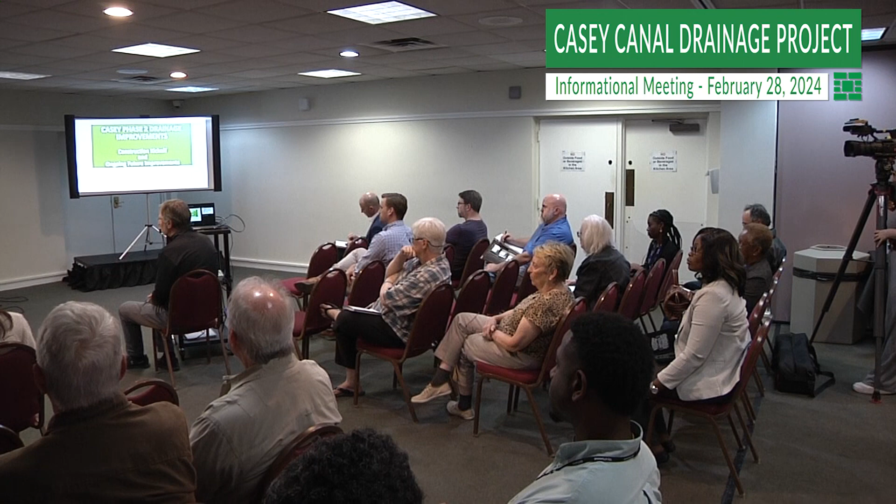Community resilience is an important thing and something we have to continually strive for. Many of the pipes you'll see in the street below you are as little as 11 inches in diameter. They're made of terracotta, made of clay, and what you're going to be seeing for the most part are two double 72-inch pipes, double barrel shotgun pipes coming down to upgrade that infrastructure.

On the maps around the wall, anything in purple is in the 100-year floodplain. That means if you experience a direct hit from a tropical system, your home is expected to flood. We've been very, very lucky not to experience that direct hit, and now we don't have to hope on a wing and a prayer any longer, because this infrastructure is on the way.

So, without further ado, I'd like to introduce you to some members of our team. We have joining with us Ron Feldner, give him a wave, Ron. That's our Senior Water Services Director. And I'll be passing the baton to Mr. Zach Hoffman coming up in a second.

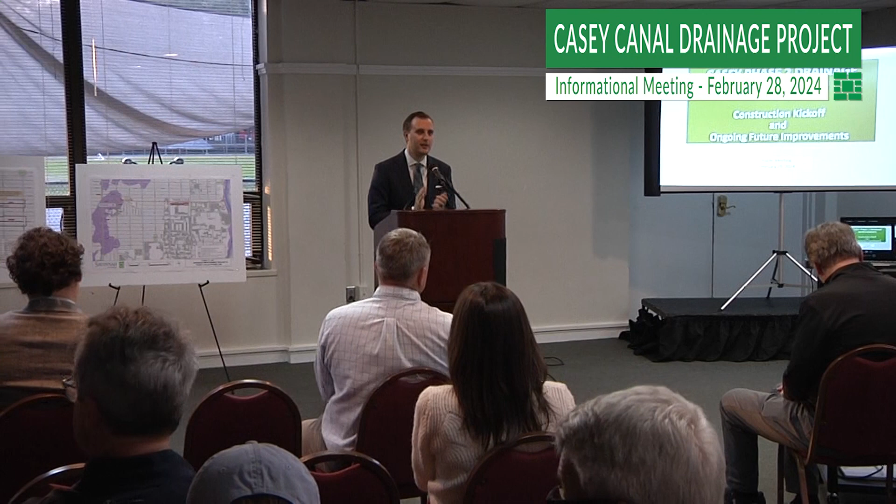These are the folks that are going to be doing the outreach, digging in the dirt, turning over some things, and we will be experiencing inconveniences in the neighborhood. That is the trade-off. But we can't hope and pray that a tropical system is not going to hit us in the future. We need to be prepared for tomorrow.

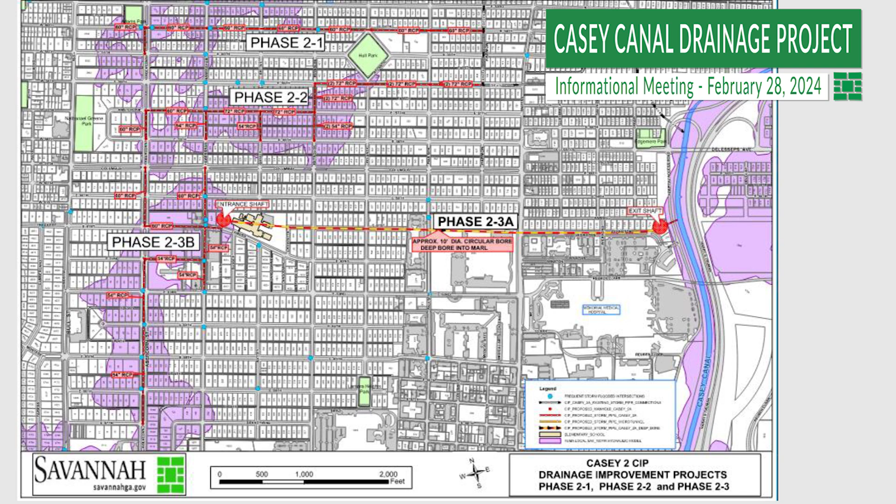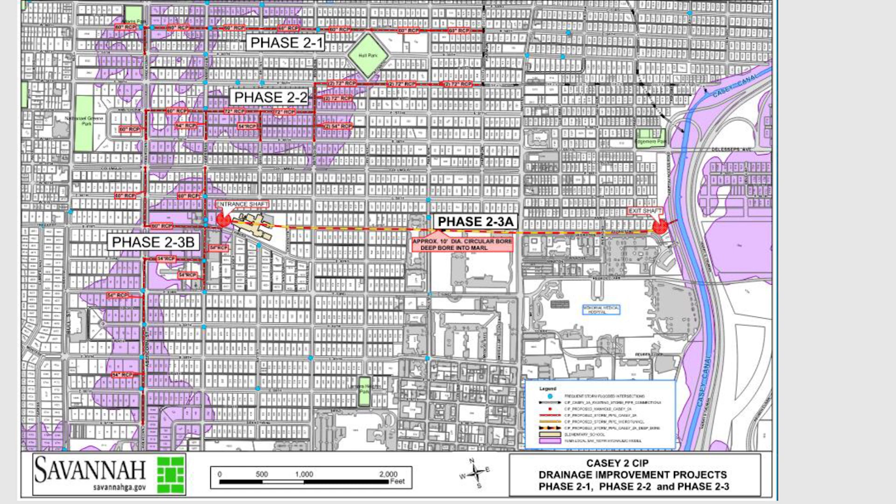You also see on this slide the phase 2-3B and 2-3A. Keep that in mind and keep this general area in mind for the next slide, where you're seeing this flooding today—that's based on our own modeling efforts with today's storm drainage infrastructure in place.

So with the next slide—Nick provided me this, I don't know where he found it, pieces taped together or whatever, some historic map. But what you can see here is basically what he was referring to as Durin Swamp. So essentially this is kind of your...

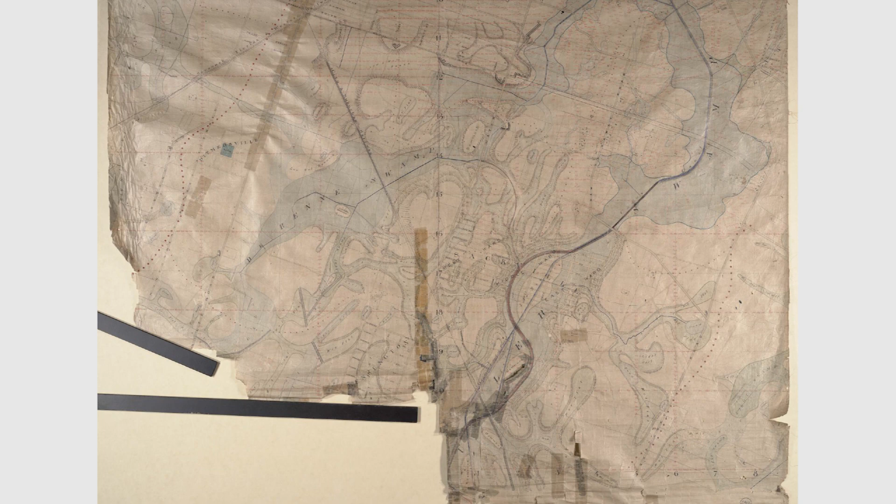Truman Parkway and the Casey Canal, which runs through this area, which was a low-lying swamp area. This is Chatham Crescent right up in here. And then this is what we're talking about right now, Hull Park, somewhere right in here, right in the middle of this Durin Swamp. And right about here, for your bearings, is Habersham Village. So all of that falls within what was historically referred to as Durin Swamp, with ditches that drained it out and everything. If you move to the next slide, this then kind of overlays.

And sure enough, we today have major drainage infrastructure, double 6-foot by 6-foot box culverts that run that same alignment. So we've maintained that same drainage. But as the neighborhoods got built out, wetlands got filled, swamp got filled, and now these areas are the low-lying areas, just like they were historically. And so we have to get that water from that Durin swamp over to the Casey Canal to then drain out, make its way down towards the Vernon River eventually.

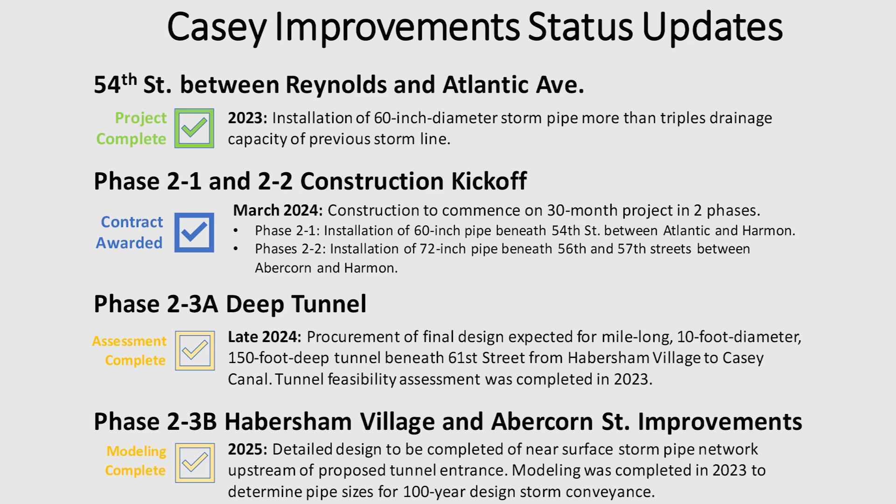So we're looking, moving forward with procurement of that final design. And hopefully if we get that, everything gets procured, we could have that done by, say, the end of next year. At that point in time, we will have good numbers on projected cost of that project, and we can then identify our funding source and everything to try to move that project to construction. With that tunnel will be the near surface drainage improvements, near surface underground pipes that will cover the area essentially of Habersham Village and Abercorn Street, which, as much as these are kind of neighborhood-based projects, we all use Abercorn. So it's a huge benefit to the neighborhood, but I think it's a benefit to the community as a whole because we're all traversing through these areas, possibly during a large event.

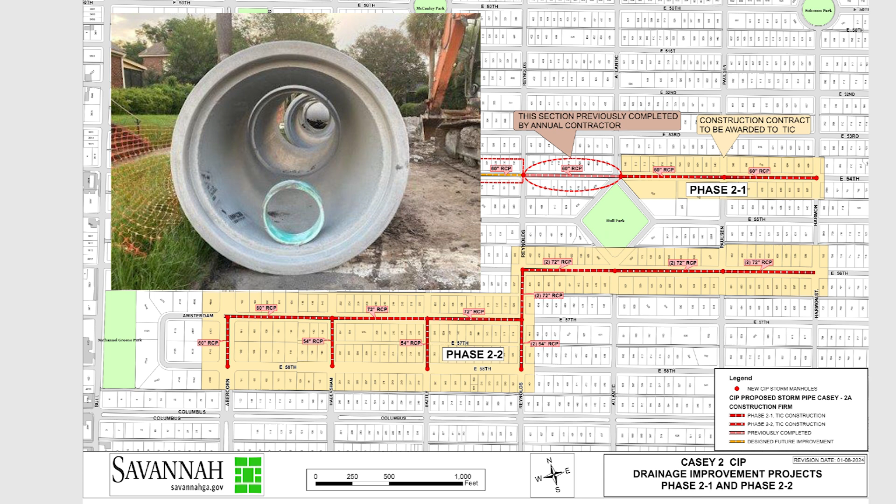That's a good point to make too. So we currently have on Harmon running north-south a twin 6-foot by 10-foot box culvert, very large infrastructure that was actually built in the Casey Phase 1 project, done in the early 2000s. If folks were present during that, I know there was some concern that was very deep construction, driving sheet pile. There were some issues with that project, and I'm very familiar with all those issues.

We wanted to make absolutely certain that this project was not that project, and it is not. I want to make sure everyone realizes that this project, we are not driving sheet pile. We're using standard open cut trench box excavation, and we have no plans whatsoever to drive sheet pile.

Our deepest excavations are at Harmon Street to tie into that infrastructure that was put in with Casey Phase 1. Luckily there was enough capacity on that system that we could tie these projects into it and provide 100-year storm conveyance. So starting at Harmon, working to Atlantic, then crews are planning to start back at Harmon and 56th Street, working up gradient as far as the fall of the pipe, drainage through the pipe, and then coming down 57th out to Abercorn.

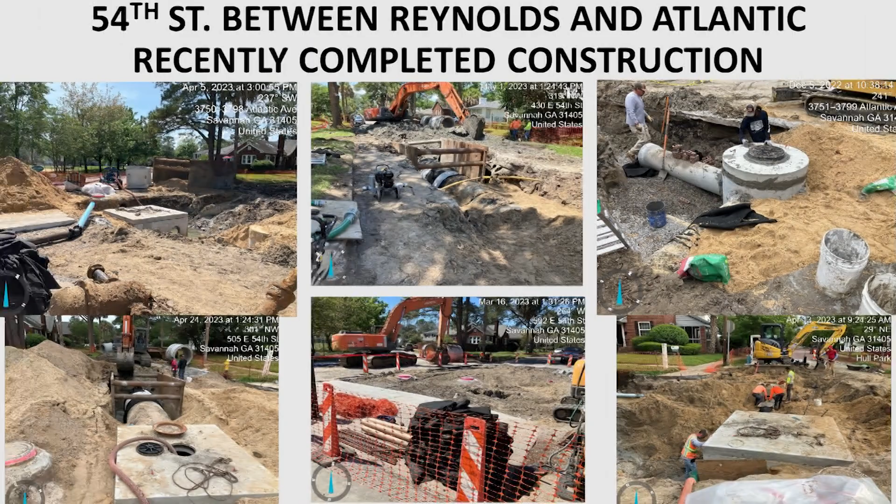So, next slide. Just to give an idea, this is 54th Street, some characteristic photographs of the size of equipment that would be present, type of excavation in the roadway, trench box type construction. Again, no sheet pile. A moving operation, installing hopefully a few sticks of pipe a day, and moving along. Yes, driveways will be impacted, in front of homes will be impacted. All the work should be occurring within the right of way, hopefully more so between curb line to curb line.

That might be a little more difficult when it comes to 56th Street, where we're putting in the twin 72-inch pipes. That's some big diameter infrastructure, so it really takes up a good bit of the roadway. With this work, we'll also be replacing—luckily our sewer, the resident sewer, runs in the lanes, so we're not affecting that. But what runs in the road along 56th, 54th, and 57th Street is storm and the water mains. So with this project, we'll actually be replacing the water mains and replacing those laterals out to the water meters. That'll be a benefit of the project as well, not only storm drainage.

So we can go to the next slide. Again, that was 54th, the one block. I wanted to point out with this slide, we did design this project, Phase 2-1—we did this last year, this block—but we did design this to actually come down 54th Street to Abercorn as well. When we put this out to bid, we have a budget like everyone else, and we did have to step back on the full scope of this work because of budget constraints. So that portion is designed. We still have plans to do that portion of the project, but funding will have to become available to progress forward with that section, and that would be a future phase then.

Backfilled, bladed off, compacted, and that disturbance that's in front of your house one day, possibly for a week, is hopefully moving on past your house. Right now, the contractor is telling us he expects to not impact any driveway more than 2 weeks. So it's a moving operation. Will you have asphalt out in front of your house? No, it may be dirt, gravel temporarily that can be driven and traversed over, until we come back, and then everyone gets a new street also, new asphalt curb to curb. So everywhere along this route will be new pavement when it's all said and done.

Okay, so this is where I wanted to focus on the construction and what's starting here late next month, but I'd be remiss if I didn't talk about the tunnel project that we're all very excited about. New technology—well, not new technology in general, but new technology for Savannah. We don't have any other deep tunnels that I'm aware of in Savannah.

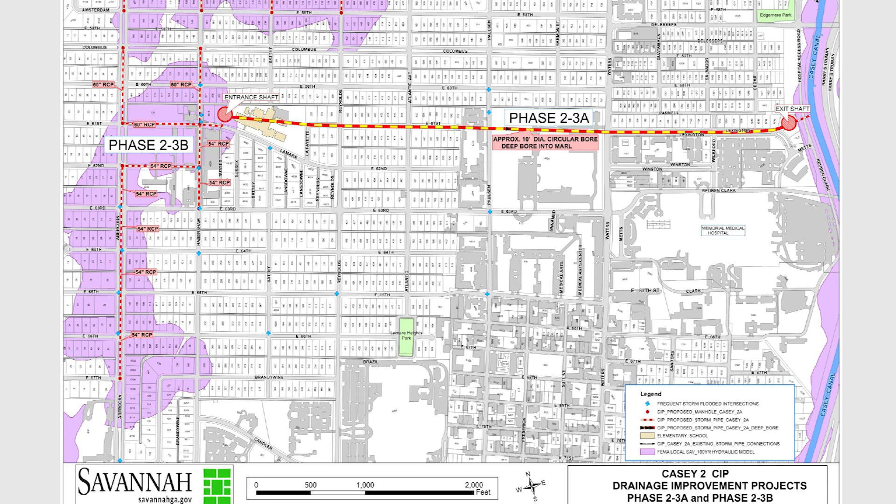That is critical, because when we were looking at draining this area of Habersham Village and designing it, that's what kept making us step back, is deep excavation, because we go through essentially this Durin swamp, which runs northeast-southwest, but then we're getting the water to the Casey Canal, and the problem is this area runs also northeast-southwest, it's kind of a ridge. So to get through that ridge, getting water to the Casey Canal, that's where we were having to look at deep excavation.

And sheet pile if we were installing that infrastructure from the surface. That's where you get into damaging houses and vibrations and all that kind of stuff, and we're out of that game. So we moved to this technology, and I'm very excited about it, excited about the opportunity to use this to take care of this area.

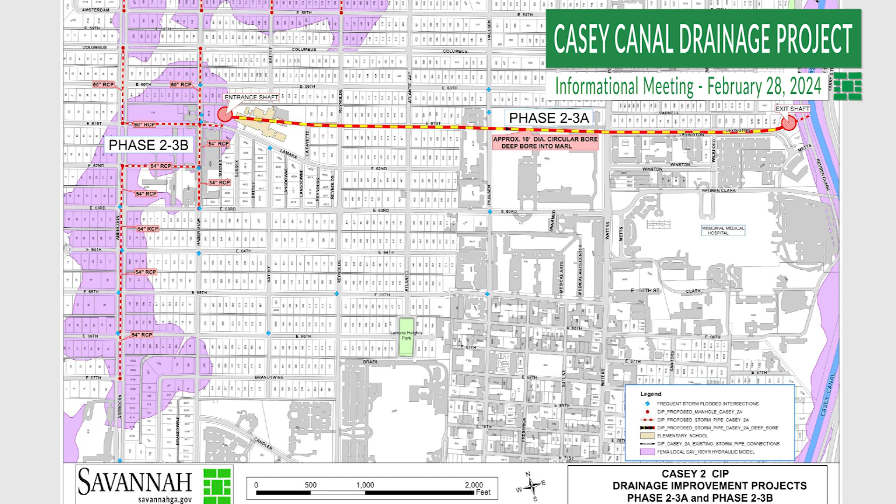So we are moving forward with, we have the funding to move forward with final design of the tunnel. And hopefully we can procure that to get started, and in about another year and a half, have that design done, and then be looking at our funding opportunities, grants, SPLOST, whatever opportunities we can to try to move forward with that project.

I'll let, I've got Stephen O'Connor and Jonathan Ladd with Black and Veatch, who did our feasibility study last year on the tunnel, talk about it. Some of these photos are examples of the tunnels they did in Charleston. I'll give him an opportunity to spotlight this on a few more slides, and then we'll be open for questions and we can break out.

Thanks, Zach. As Zach mentioned, this technology has been used in Charleston for over 25 years. The image on the screen here is the Spring Fishburne Tunnel. Very similar geology, so we did borings during the feasibility study here to confirm that the geology underneath Savannah would be acceptable for tunneling, and it is.

It's a Cooper marl material, a clay, very stiff clay that you can usually excavate sometimes by hand, via a simple tunnel boring machine, which is what we'd anticipate for this project. So the diameter of the tunnel would be about 10 to 11 foot excavated, and that's what you're seeing here.

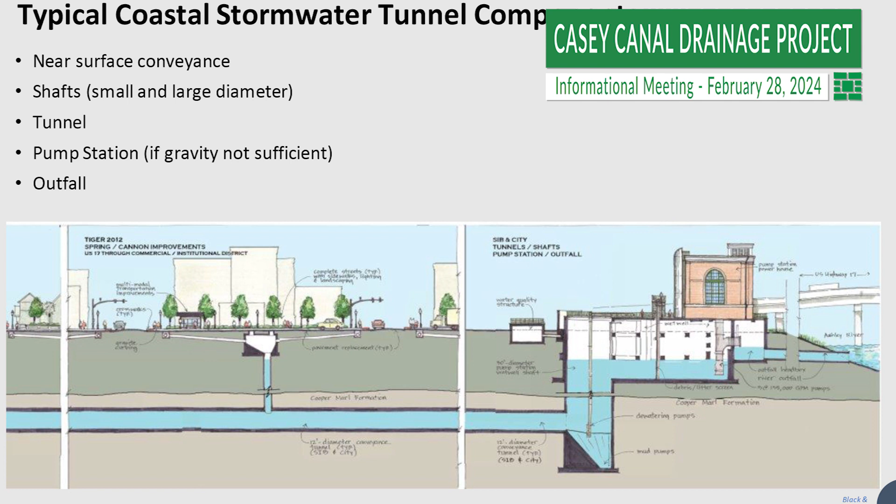So in Charleston, very similar idea. You have the near surface connections, similar to what Zach was showing in the other photos, the box structures, the traditional reinforced concrete pipe, collects the water at the surface, puts it down a deep vertical shaft, and then into your deep tunnel. We'll be about 100 feet below Savannah here, and then via gravity, it will flow to the Casey Canal. Same here, there'll be a deep shaft, so the tunnel will come in, water comes from the surface into the tunnel, and ultimately out through an outfall into the canal. A pump station can be added later for additional volume, but the idea is that you have gravity flow.

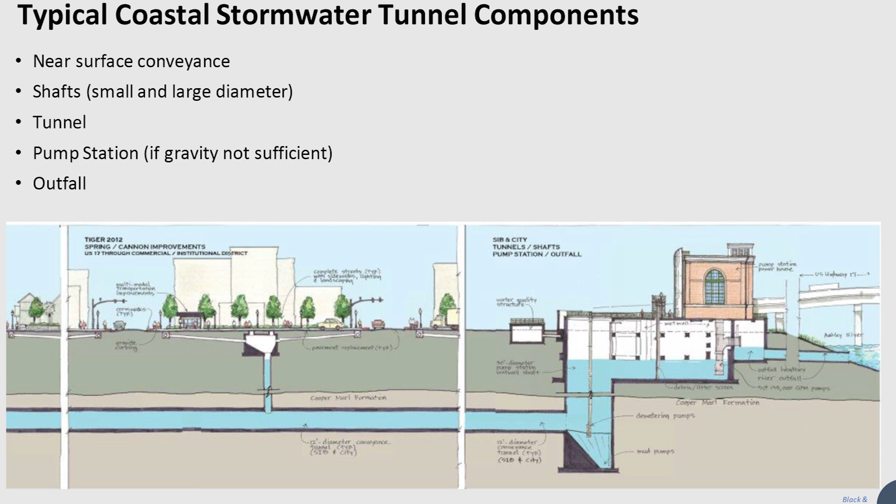Zach showed the photo, and a really good example is you're not disrupting but two areas for the entire project. That's the uniqueness. You have a shaft site at one end and one shaft site at the other, and everything in between is deep below the infrastructure and is not causing any disruption.

This is intended to show that everything still remains on the surface. You can still build infrastructure on top of the tunnel, so that's part of the consideration. There's an easement, deep easement below, and then everything above can still remain. This is showing that piles can still be driven. Infrastructure above is not impacted by the tunnel construction.

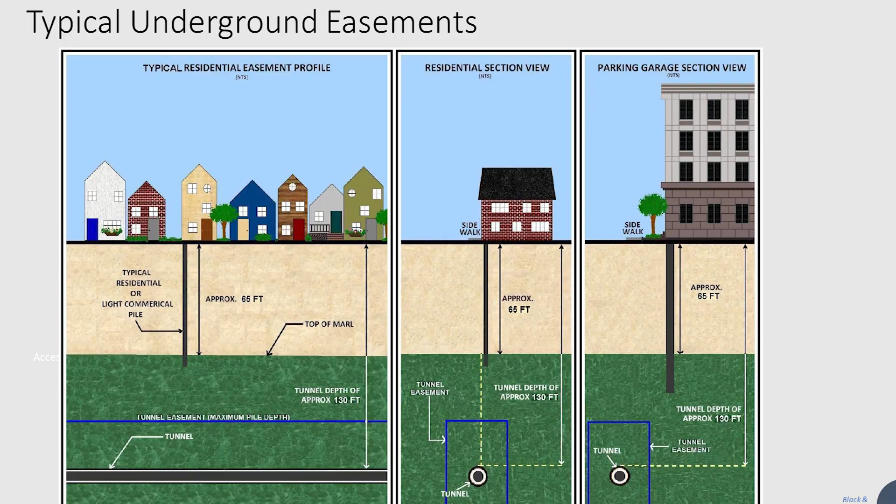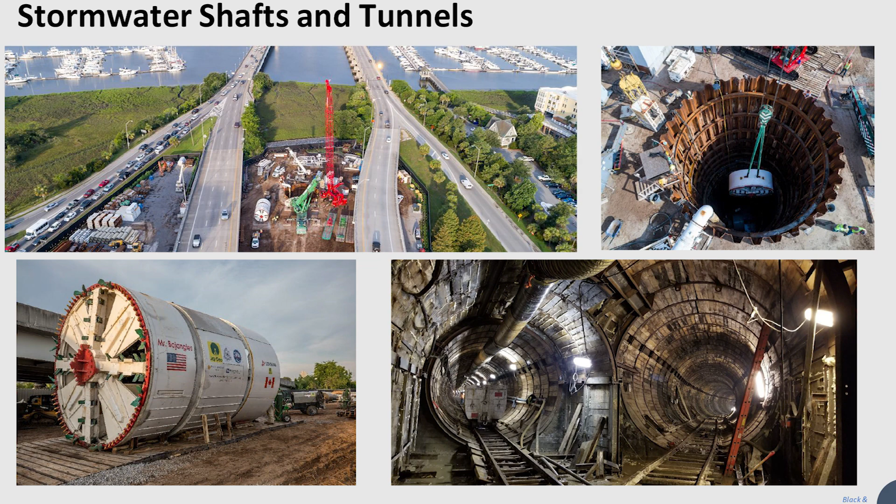So that's kind of the similar technology we'd anticipate - a machine that's proven and has been used in other similar ground. This is between infrastructure, the US 17 bridges over the Ashley River, showing how close you can get to some critical infrastructure with these deep shaft locations.

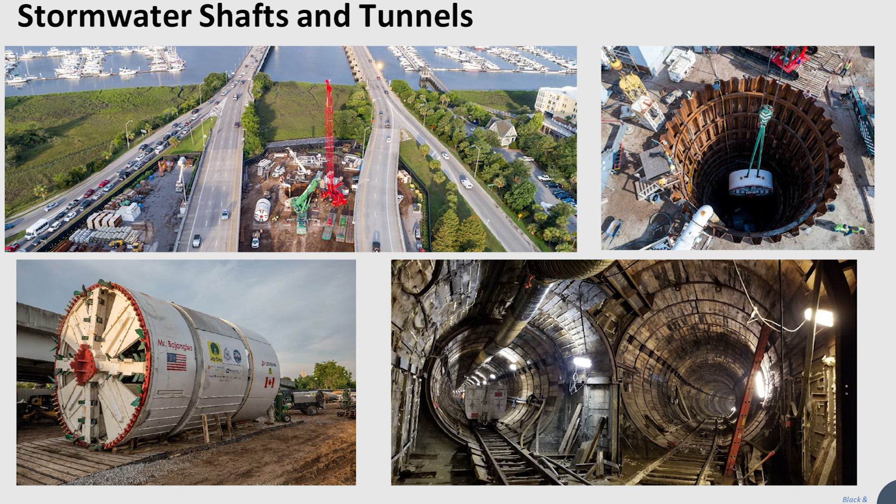Here's an image of the tunnel boring machine being lowered into the shaft. This looks like a mirror image, but it's actually the intersection of two tunnels below US 17 in downtown Charleston. You have an 8-foot, eventually 8-foot finished diameter tunnel, and a 12-foot finish. What you're seeing here is the excavated and supported tunnel with wooden lagging and steel ribs, the same type of support we'd anticipate in Savannah.

That's the same image, but this shows during excavation. You can see the muck car, they call this - train tracks go into the tunnel, and the muck cars go up to the face of the tunnel boring machine. The material's dumped into those muck cars, then they come back out, lifted out of the shaft, and they haul that material away. While they're pushing the tunnel boring machine forward, they're lining it with these steel ribs and the wooden lagging - it's like a wine barrel almost on its side.

Very old technology, but simple and effective. Ultimately, at the end of the day, you're having a reinforced, or sometimes unreinforced, concrete-lined infrastructure at depth.

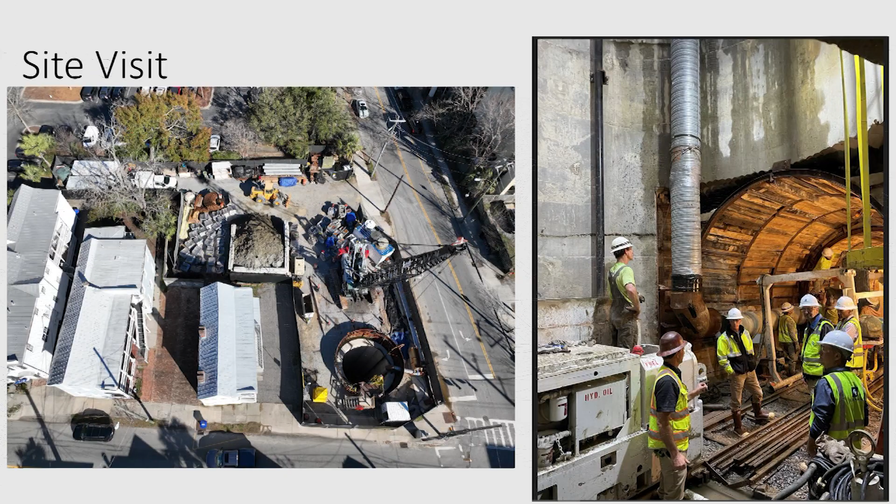This was an extension to that tunnel system, connecting to the medical district in Charleston to help drainage there. This is a house that's occupied during construction - deep shaft, 100 to 150 feet deep, and a 20-foot diameter shaft, so maybe 30 feet from the foundation of that home. We are not anticipating being that close to any property or house on the tunnel project here, but it's just to show the disruption is very minimal. This is the only site, other than the other drop shaft site, that has disruption along what would be a mile-long stretch of tunnel.

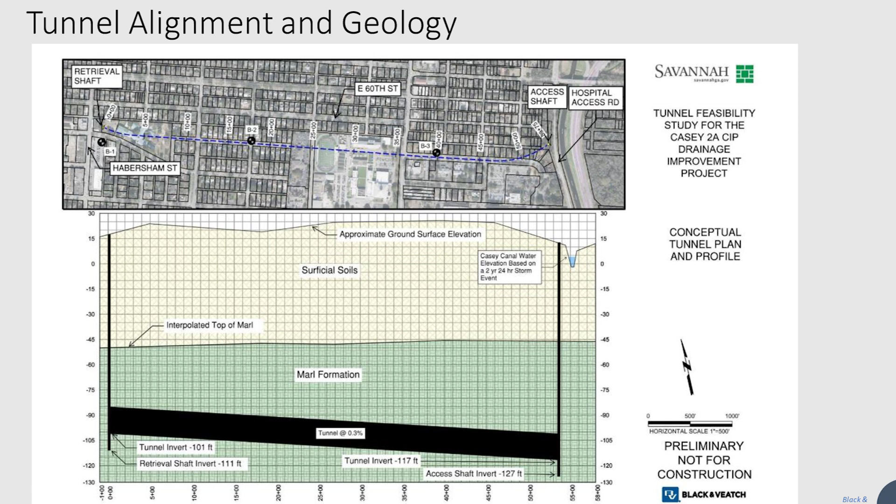Another image, coming from Habersham all the way down to the hospital access road, the Casey Canal - this is showing that the tunnel will be in what we're calling the marl formation. So you get through the surficial soils, which aren't as good as the marl, to get down to the material that's better for tunneling. You have the shafts down deep, and then once you're in this nice marl formation, this is where the tunneling would occur.

One more image of the tunnel. You can see some of the borings we did - B1, B2, B3 - some of the initial geotechnical work to confirm that it was feasible. One of the ideas is to go from the school here underneath, taking the quickest route, like Zach mentioned, from point A to point B. That's the intent here, and that's planned 60th Street.

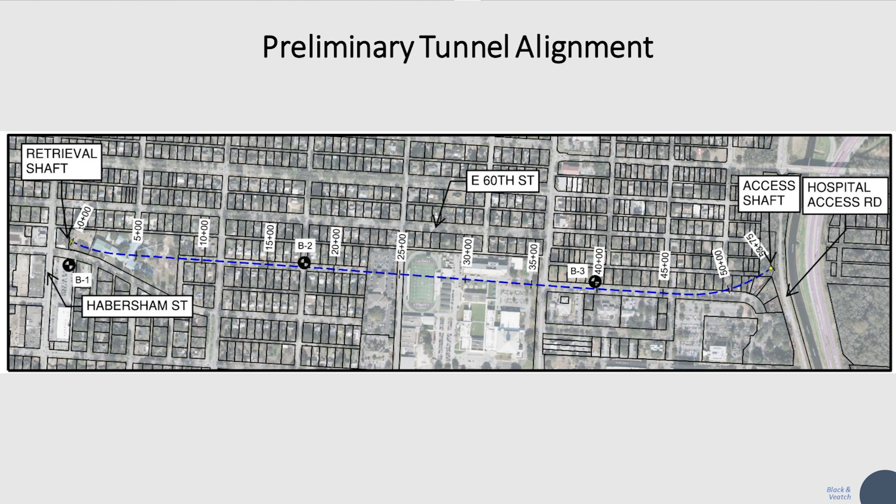We would try to stay within city road right-of-way with the tunnel below. When you're looking at having to get deep tunnel easements, the idea would be to put it in the road right-of-way so that we essentially have that vertical easement, a right-of-way already. Then it would go down 60th Street, but it would cross over some private areas there, the Calvary football field. We would need to gain some of those easements, but as the exhibit showed earlier, deep pile foundations can be installed over the top of this with no issues whatsoever - we're that far down and below the marl, so no impacts to any future development or construction of any size.

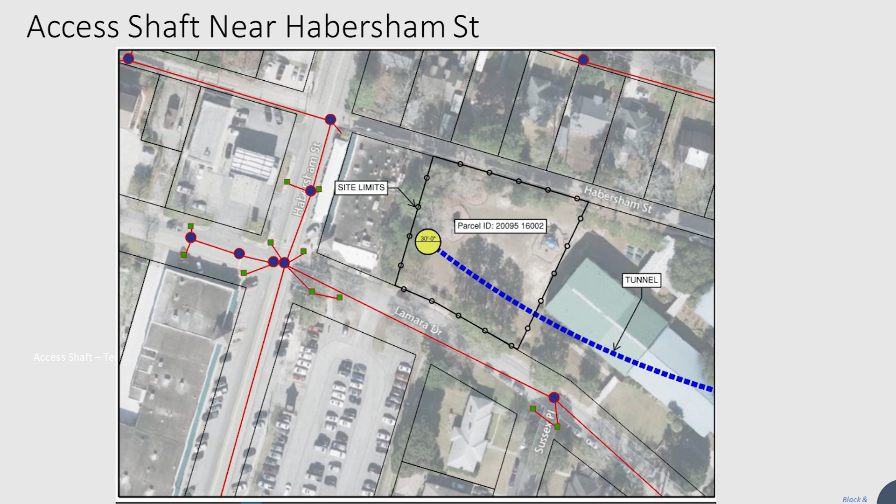And likewise, at the other end would be the outlet shaft. So you're seeing the hospital access road, Truman Parkway on the other way, and the Casey Canal. Once the water gets here, it comes up vertically into the shaft, and there will be an outfall constructed under the road connecting to the Casey Canal.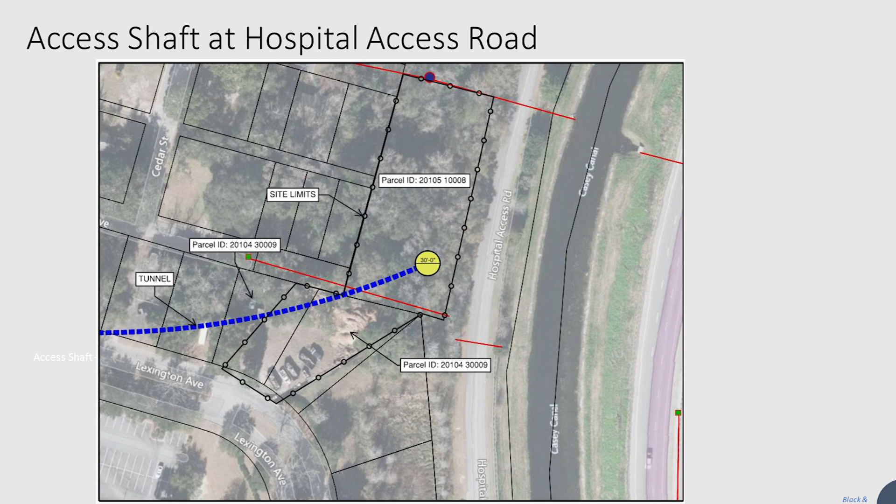The plan is not to have a pump station, but to size that tunnel and the vertical shafts, entry and exit shafts, to actually handle gravity conveyance. There may be a small pump for dewatering, but not a station requiring a lot of electrical input to operate. We're planning to use a gravity type system, and there's enough differential elevation between Habersham Village and the Casey Canal to accomplish that.

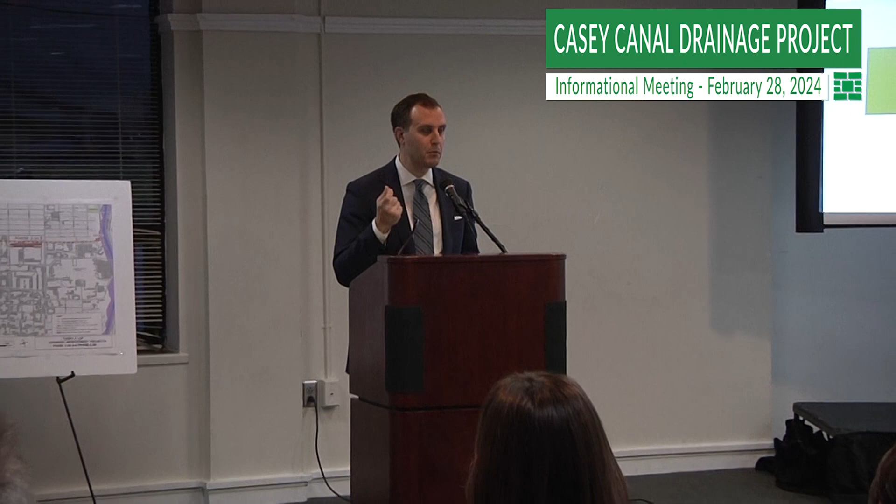Before we open this up to questions, I wanted to introduce you to one VIP for this project, such a monumental investment - there's one guy on the scene dedicated to answering your questions and being a personal point of contact for every member of the community. Philip Caligotonis, if you could please stand and come say hello. You may have seen Philip on the door hangers and flyers out there.

Please stick around and grab his contact information. His cell phone number is 912-755-9998. Again, that's 912-755-9998. There's also a QR code on the door hanger, and he is deeply and intimately connected to this project.

If you have any questions about timelines, what's happening on your block, any questions or concerns - it is Savannah, Georgia. When we open up a street we haven't opened in a century, we're going to find some stuff. But we're going to keep working through it together. It'll be slow, maybe a little painful, but it's absolutely necessary. It's going to help protect the neighborhood. So with that, do you have any questions for the team?

Yes, sir. So the tunnel, conceptually, it's like a giant sink trap - what do you do with stuff that precipitates? Zach mentioned it, but at the bottom you'll put a dewatering pump so you can get in there and clean it out. What we've found over time is we have enough velocity that it actually scours that out and keeps it clean enough. And if it doesn't, you can get access to that shaft to clean out the buildup of sediment down there. Yeah, it's a good question.

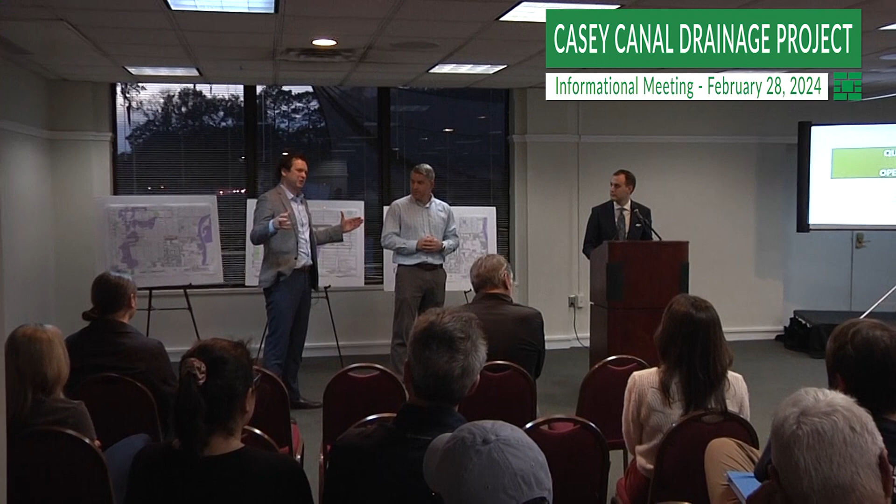There'd be like a larger debris trash rack or something at the entry of the pit, maybe? There can be - you can design it so you either catch the debris at the inlets or catch the big stuff before it goes in. You have the basketballs and bottles you don't want getting into the system. Great question. Yes, sir.

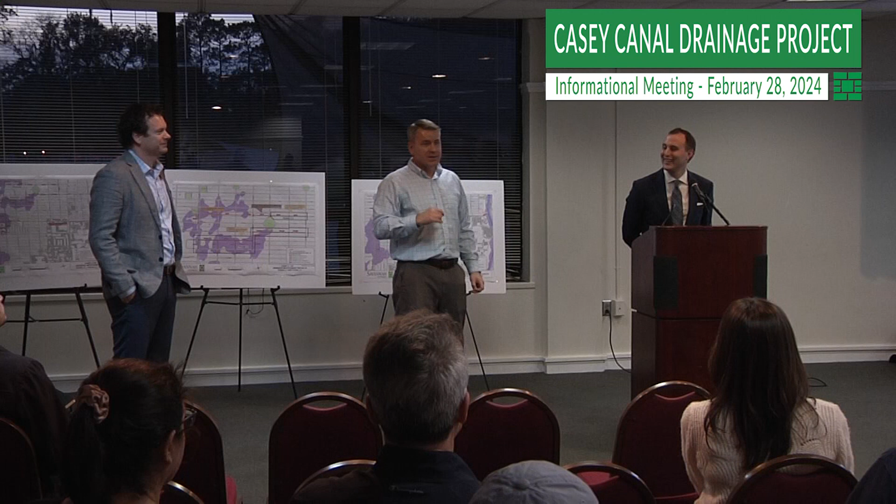All three streets simultaneously or in sequence? No - and I do want to introduce, I'm going to have them walk up here for more questions and then we can break out. But the contractor will be dictating his schedule and that sort of thing. Talking with him, you're planning to do Harmon on 54th Street, complete that to Atlantic, and then drop down to Harmon and 56th, and start a moving operation along it.

Starting at Harmon - I'm sorry? Starting at Harmon? You walk up there and show them again. Oh, I'm sorry, yeah, starting in Harmon. Okay, starting right here, Harmon 54th, that's where you'll see some activity. Late March, right after St. Patrick's Day, you should start seeing equipment mobilizing right here. So they'll start here, work their way to Atlantic, tie in to what we did between Atlantic and Reynolds. Then as they're completing that, you'll start seeing activity down at Harmon and 56th.

They will begin a moving operation installing this twin 72-inch - these are 60-inch reinforced concrete pipe, okay, 5-foot diameter pipe along here, tying into the 5-foot diameter we installed at this block. This block here, these three blocks, are actually twin or double barrel 72-inch pipes, a little bit bigger infrastructure, a little bit bigger drainage area.

Currently you have existing infrastructure, and we're not removing it, we're just adding infrastructure. So currently down 55th Street you have a 48-inch reinforced concrete pipe. That will remain, and with these projects going on, it just provides that much more conveyance capacity, relieving the stress on those existing pipes.

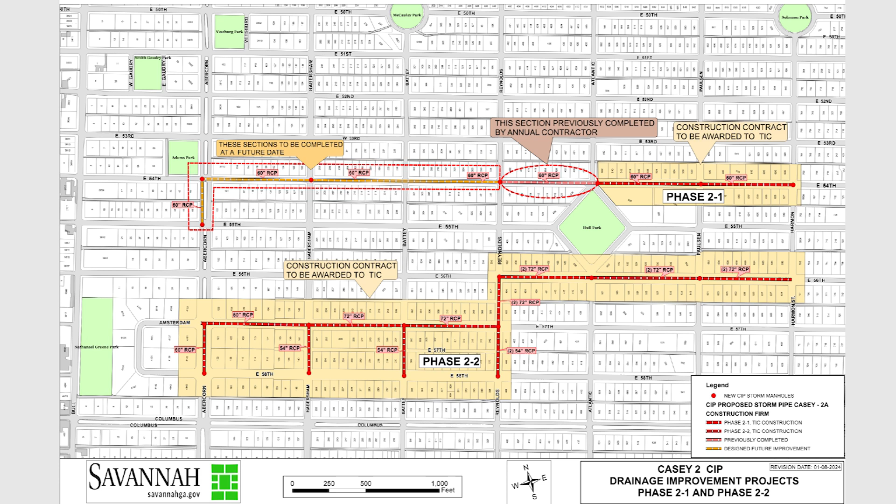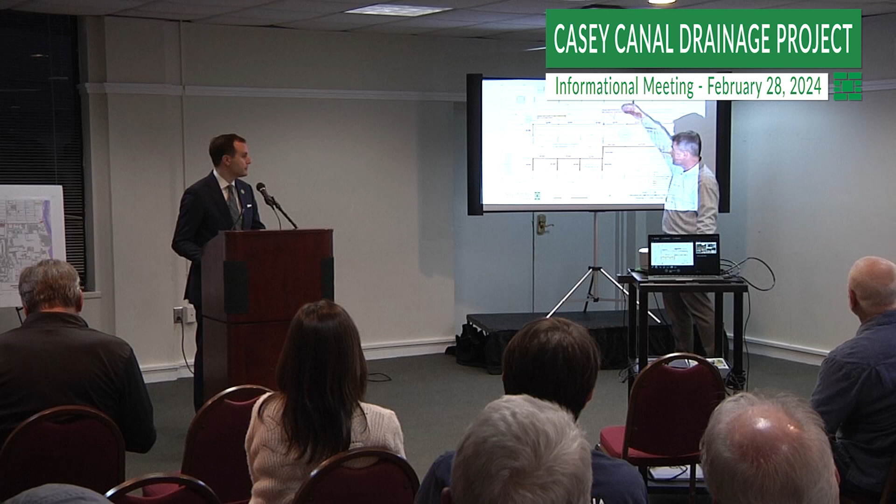Even though we had to step back a little bit and take this out of our scope of work, this grade here down to Reynolds drops about 3 feet between Abercorn and Reynolds. So getting this tied into Harmon is key, and it's not just the road this infrastructure is being placed in. There's other storm drainage pipe running north-south on these other roads, Battey, Habersham, so you relieve capacity and free up capacity on those lines to move the water out.

So it's not just improvements along the route. You're going to see improvements throughout this area, throughout the neighborhood.

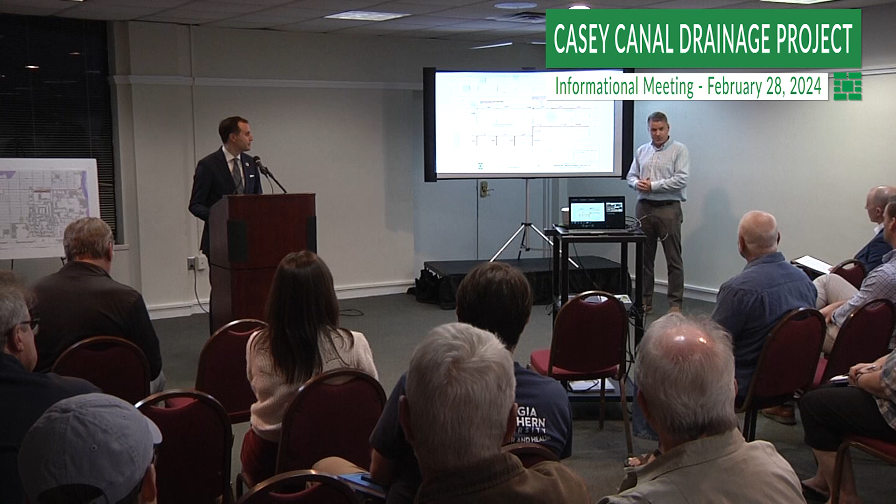Any of that damage to the landscape or something like that, we're going to clean that up, dress that up, regrass, resod, whatever we got to do to make that square. Realize the city's right-of-way goes outside the curb line, up into the yard, 10, 15 feet. So just realize if something is being stored on your lawn, just behind the curb line, that's going to be addressed and stabilized and put back right when it's all said and done. We're not going to allow the contractor to tear your front yard up and walk away.

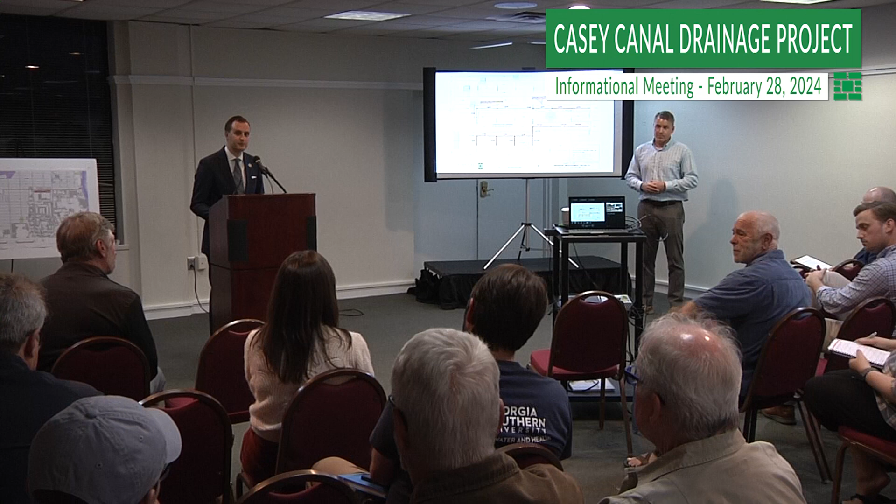Yes Jen. You've actually answered all the questions that I've prepared, so thank you. But I'm delighted to hear that we're getting a new water line. What are the anticipated interruptions with our water service?

That's a good question, and I'm going to throw something at the contractor. So John or Greg, y'all want to come up, I need to introduce these folks anyway. TIC is our contractor, if y'all folks from TIC, just come on up. Don't be shy, I know everybody hates public speaking. Or we could just turn our chairs around. All right.

So TIC is our contractor awarded this project, big project, big shoes to fill here, but we're here tonight. They wanted to be here tonight. We want to get out to the public and answer as many questions as we can, and try to relieve any anxiety or misunderstanding. So please fire away.

So that question again, I'm sorry. Disruption to water service. Yeah, so we are putting a new system in, so there'll be switching over going on. That's a very brief thing, going from old to new. Hopefully we won't be breaking the line, but if we do, we'll repair it, but it'd be very brief.

And like I mentioned earlier, plumbing issues can occur anytime. I do want everyone to know there should be no impacts to your sanitary sewer system with this project. The sewer main is in the lane behind the houses, and your sewer laterals go from your house to the lane to tie into that. So out in the street in front, you should not have any interruption to your sanitary sewer, but your water main will be replaced, so there will be some period of time in which it'll be disconnected.

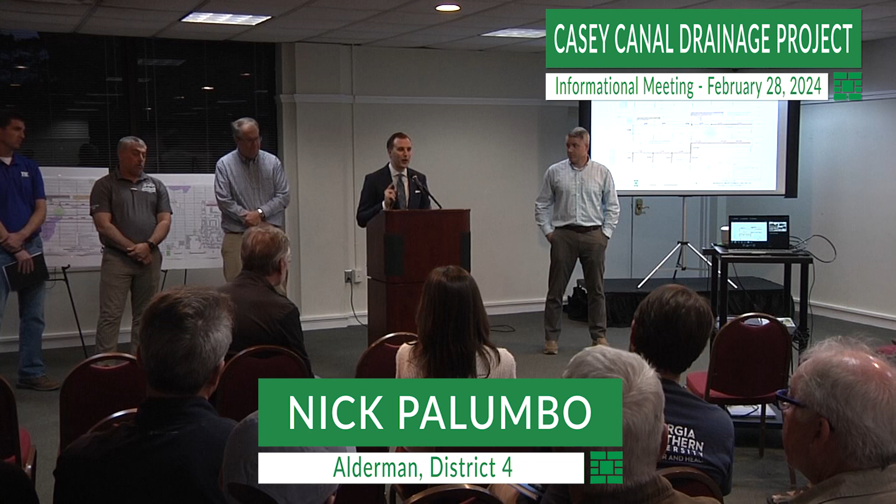And before I forget, don't forget that when this is finished, you get the lovely opportunity to haggle with your property insurance. Because we're making a $40 million investment in your neighborhood and taking you out of the 100-year floodplain, you should be seeing a discount on your property insurance. However, you have to ask for it—they're not going to do it automatically. Why would they go and do such a thing?

So as it's complete, be sure to take pictures of the construction, show them the evidence that it happened, and ask for a recalculation. I hope that you have flood insurance. If you do not, okay, that's your choice. But if you do, you should see a significant discount on your flood insurance and your homeowner's insurance as well to save you some money.

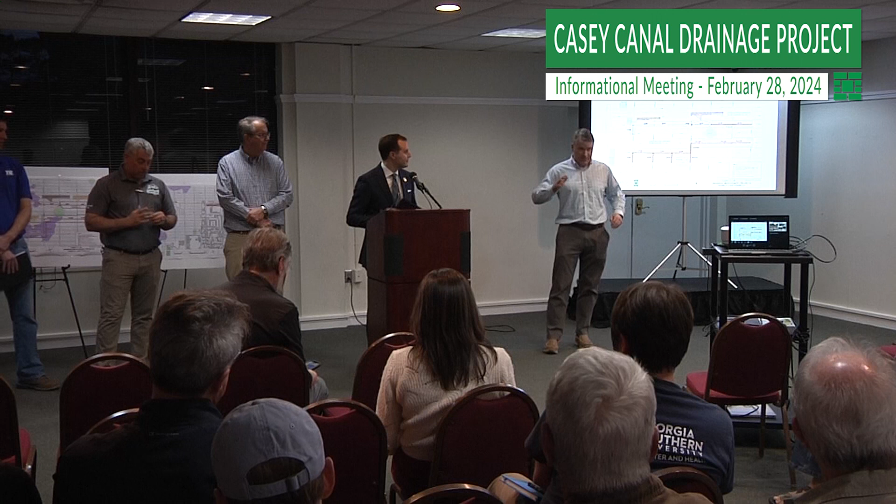Okay, now with that, I'll mention one other thing. Talking to the contractor, the vibrations that anyone should feel would be not from driving sheet pile. Again, we're not doing phase 1 like we did in the early 2000s, but this is big, heavy equipment, and as it just walks on the asphalt in the street, it's like a big heavy truck going down the street and hitting a speed bump, and that causes vibrations. So if you do feel some vibrations, that's what you're going to feel—very low rate vibrations, not the high intensity of driving and setting sheet piles. So it's a totally different type of construction method than we used in phase 1.

Oh, we have two more questions. Yes, sir. I get it, we learned the wrong way to do it 20 years ago. Yeah, I was living in another part of the neighborhood back then. Are you going to do any seismological monitoring or recording in case arguments ensue about cracking on brick foundations and whatnot?

At this point in time, we do not have plans to do that. We didn't do that on 54th Street at Reynolds and Atlantic, and we didn't seem to have problems without doing that. The contractor, that's kind of up to their means and methods if they want to incorporate that. Just to add to that, we used to at Baldwin Park several years ago, same type of construction methods, but no vibration issues there at all. It was sheet piling that caused those problems, and we're not doing that. Thank goodness, no sheet piling.

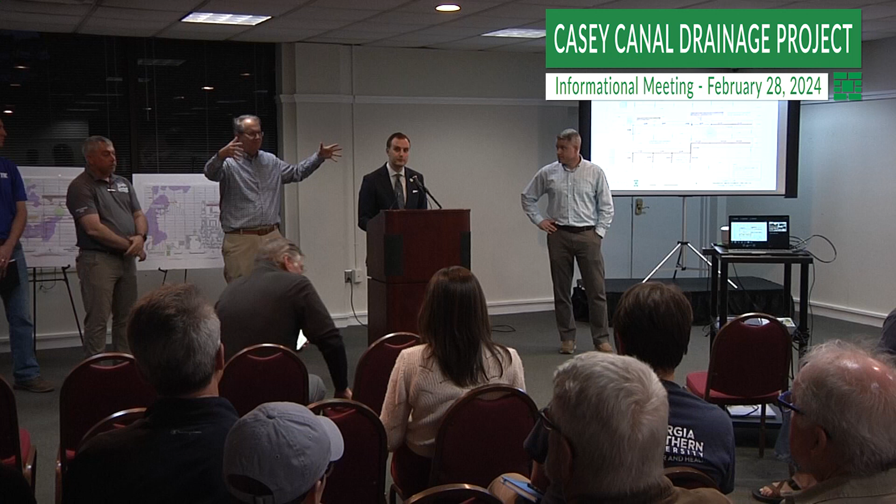Correct. I'll let the contractor decide, if they want. We use a tool, it's a trench box, or you could say a shield. You're not gonna use sheet piling at that intersection? No, ma'am, no more cranes and pipes, no more cranes and vibratory hammers. It's a structural box, basically, that we excavate and install as we excavate down.

Like that, and we have vibrations, but we have to connect to the side of that wall, not all the way to the bottom where that previous construction had to dig down so much deeper to build up. So we're connected to it, but we're not as deep as that is, maybe 30 feet.

And thank goodness the technology and methods have dramatically improved over the last couple of decades, especially for phase 3. We were looking at some dire options to get the infrastructure where it's needed most, and honestly have to go through neighborhoods that didn't need the infrastructure to serve the ones that did. So the technology and methods are improving. We try to be as minimally invasive as possible. Now the trade-off is it is a little slower, but you're not going to see the same damaging impacts, and we're able to build as we go.

At Harmon and 56, the infrastructure that was put in in the early 2000s, I believe, I'm trying to remember what we have on our asset management, but I think it's twin 6-foot by 10-foot box culverts, so these are 20-foot wide and 6-foot tall structures. And at that intersection, you have a junction box that those tie into as lines go different directions. So massive infrastructure that was put in with that project. And all we're doing now is tying two 72-inch pipes into that structure that was already built in the early 2000s. So very different, much smaller infrastructure when you consider that.

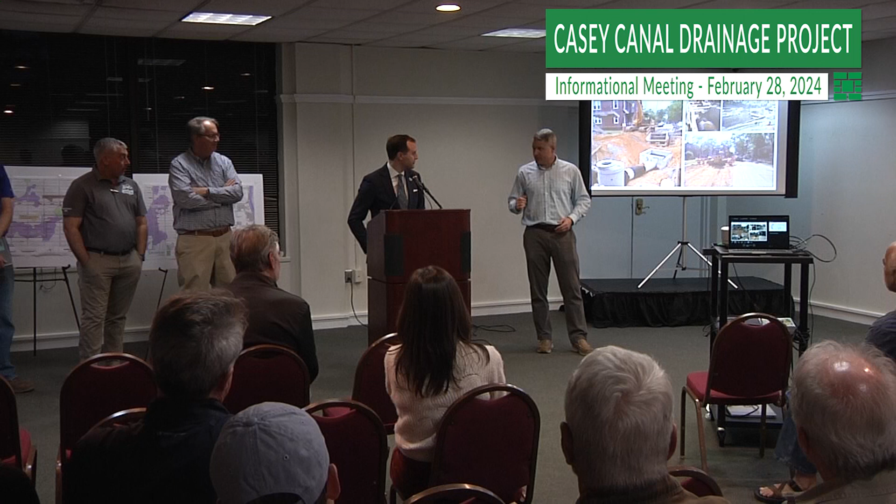I was talking to the contractor the other day, and they said, well, we've got some big junction boxes, still nothing like at Harmon and 56, but it's heavy infrastructure, these big concrete boxes. So they may have to bring in a crane for the day or something, just to take that box off the truck and set it in the hole. But realize that crane is there for that, not to drive sheet pile, which cranes are used for as well, but that is not why the cranes will show up on site. Okay.

So the water line is gonna run in parallel with this project? Correct, it's gonna go in the offset, same stages as the storm drain. It should lag behind slightly. Since you're paving over it... but we won't pave yet. So we'll run the storm drain, and once we're just about done with that block, the water line will start, so we can keep giving access in and out. We can't do both of them because that'd close both sides of the road.

We can't do both sides at the same time because it would block off complete access. So in order to keep either the north side or the south side lane open, we'll do one and then the other. You're going to do the entire street for the storm water line and the storm drain before making individual connections? Yes. Do you have an idea how many blocks, or a complete phase, before you go back and finish the asphalt? Right now the plan is each intersection and block would be our mobilization for paving, which is what happened last summer on 54th.

Correct, we laid it all down, a full block, finished, and then paved over. Or they pour concrete in stages. They did to stabilize the surface, and they'll have to decide what to stabilize it with, crushed rock or whatever, knowing they still have to put the water line in before they pave everything and get on it. Probably won't be concrete.

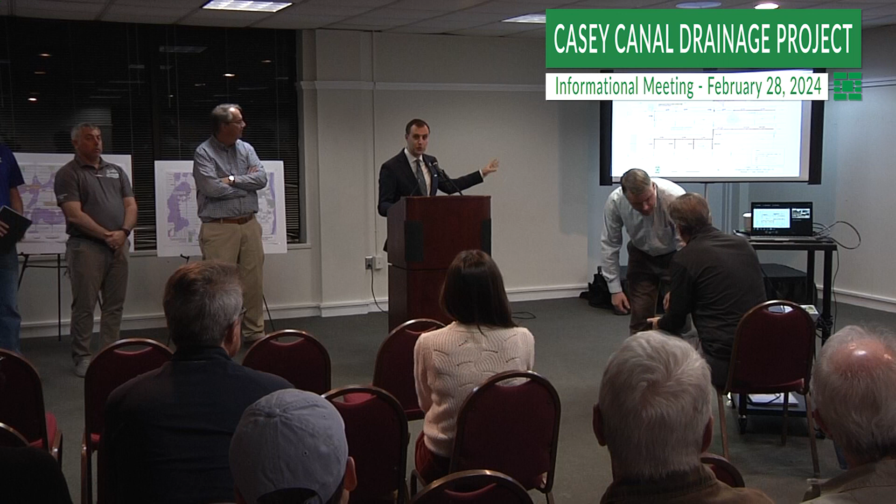As Ron was just saying, even though we're not getting that section done, folks along that section are going to see improvements, because just getting this portion done takes capacity relief off the existing 48-inch line running down 55th Street. These lines tie into it, and doing this project will relieve the 55th Street 48-inch diameter line, because it drains into it now. So this conveyance will be picked up and taken to Harmon Street, releasing capacity on that line. So you're still going to see improvements.

But will you see 100-year storm event conveyance without some water ponding in the street? No. Our model says we need that to relieve it. Well, and I know that the brain can only absorb what the rear end can endure.